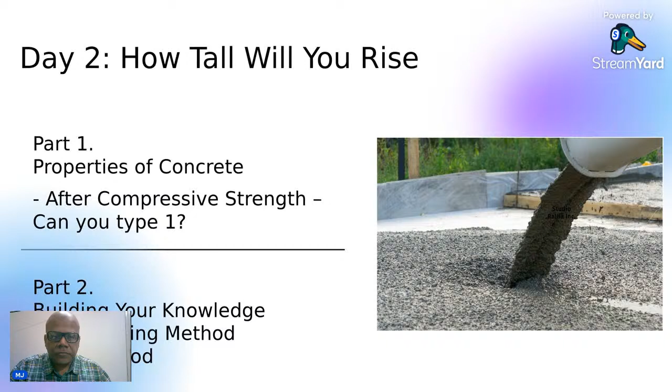And learnings from day one, very quickly I will go through them again. I'm always looking at the clock, to see that I don't spend too much time on something, so that we will have little time left in our 90-minute span for other things.

Okay, so yesterday we discussed that the future belongs to the expert. So somebody had asked a very nice question, and I didn't answer it yesterday - how many civil engineers are there in India today?

Indian construction industry is going to be the largest employment giver in our country as an industry. That means by year 2022, 75 million people would be employed by this industry, out of which around 50 lakhs are civil engineers. What happens to other civil engineers?

So many join the profession. Every year we have seen 4-5 lakh people are added. So we are talking only about the last 10 years. If we calculate like that, 50 lakh civil engineers working. These are all estimates - I got this figure from a study done by Economic Times, and it is available on Google, you can check it. But there is no pakka, foolproof answer to the question. The answer is about 50 lakh, 5 million.

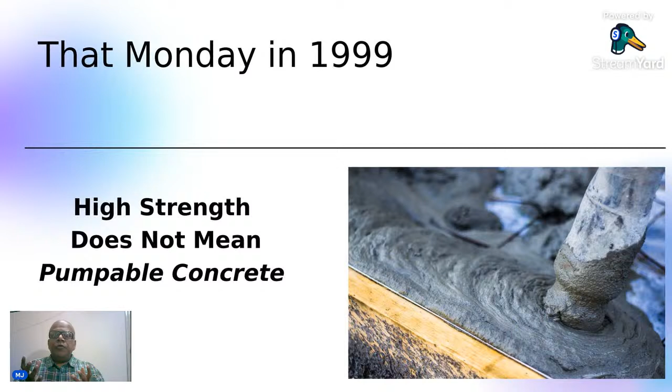My boss was very angry with me on that particular day. But the next day he called me into his cabin - Mr. Klaus Munz - and he said, Mr. Joshi, do you know that in Europe we use fly ash in concrete, which helps us in pumping.

It was year 1999. Even for Europeans, it was a new concept. But thank God my boss had heard about it, or maybe he called someone the previous night, to find out how to make the concrete pumpable.

I said, sir, ash? He said, yeah, from the coal. I said, sir, ash from the coal you want to use in concrete? I thought my boss had gone mad. Who will use ash from coal in concrete? It will spoil the concrete.

He said, no, go and check first. It is a good thing which is used in many prestigious structures in Europe now, and it also helps pumping.

So then I started finding out, and I came to know there was a company just coming up at the end of '99, year 2000, in Nashik, who would process fly ash and sell it for concrete. Oh my God, I thought my luck is finally favoring me. So I started doing a lot of study of this material called fly ash.

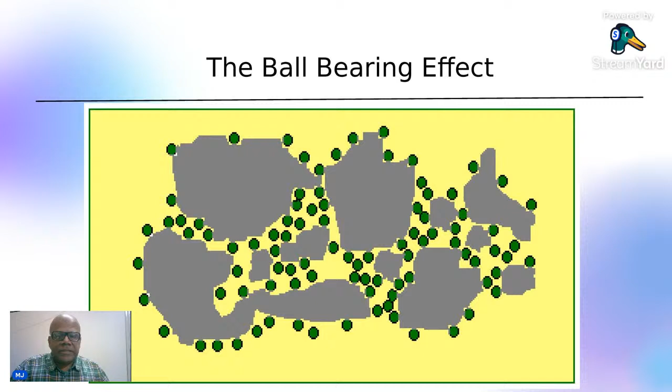So I had a mentor during my very early years, '91, '92, Mr. T.T. Fatehi, a great civil engineer and also a structural designer. And he told me once, Mr. Joshi, do you know why we have these columns thick, and why the coconut trees are so thin? A coconut tree is a horrible cantilever structure, isn't it?

You see, so much load is there on top of that tree, and then the wind blows, but the coconut tree doesn't fall. So what is the civil engineering behind this? And why, for our building, do we need such heavy columns? Not one, this is a single column structure, a coconut tree, but we need 4, 6, 8, 16 columns. We need a core wall whenever we are building a skyscraper. So why is it, he asked me, that we engineers cannot design a structure like a coconut tree?

So I said, sir, maybe our technology is not so advanced. Maybe we don't understand materials the way nature understands how to design them, like the trunk of the coconut tree, how elastic it is. He said, yes, that's the right answer, the modulus of elasticity.

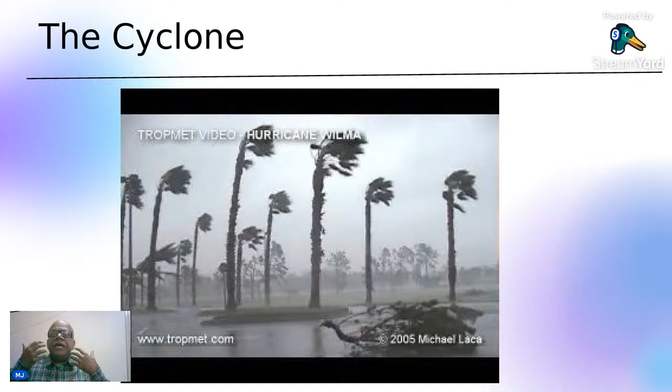So this point gave me a lot of thinking at that time, particularly this term, modulus of elasticity. In all our college days, we have used the value of E, the modulus of elasticity, in solving all the problems. But I never really understood this term, modulus of elasticity.

So today we will see a few of these terms, as I said, from the Bible of our civil engineers, IS 456. All these terms are defined, given in our IS code, and we should look at them and understand them, because that is where the real durability of our concrete comes from.

So compressive strength we all know, right? But the question is, do you understand strain? Everybody, 100%. What is strain? What is strain in concrete? So you take a certain object...

and you apply pressure on this object. This is just a bottle and I am applying pressure on it. So when I apply pressure, I am generating stress on it. So whenever there is stress on an object, there is change in the length. Assume that this bottle is 1 meter long and I am pressing it, applying some stress.

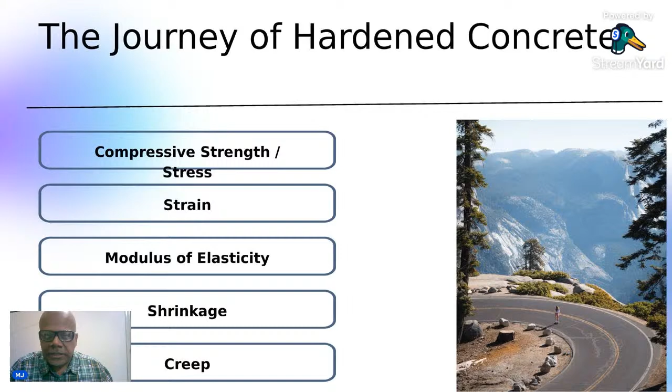In civil engineering, let's turn it around. Let's say this is our cube and I am applying stress on it. So here it is, our cube, and you are applying stress on this cube. The moment I apply stress, the height of the cube, which is 150 mm, is going to change.

The height is going to reduce, and that is what strain. So strain is dl by l. Mr. Patil, thank you very much for your answer - change in length upon original length.

Very simple concept, right? But the problem is the modulus of elasticity, we define it as stress divided by strain. So let me say, on this cube, I have applied lot of stress, and let's say this stress is M20 grade concrete, so 20 Newton per mm square. Stress is nothing but the strength of your concrete.

Whenever we get confused about what is stress, don't take stress because of that. Stress is our strength of the concrete. So M20 concrete is 20 Newton per mm square.

Now I am pressing it, and after pressing it, a 1 meter beam or 1 meter column of concrete deflects by 1 millimeter, only 1 mm. The length is reduced by 1 mm. So stress 20 Newton per mm square divided by 1000, because 1000 is the original length and 1 mm is the change in length. That ratio gives you modulus of elasticity.

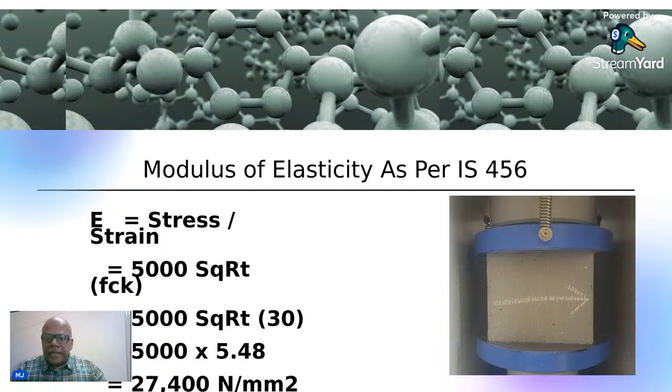If I go ahead, these curves are much more visible. Okay fantastic, so let me go to the next slide, and there are some curves here and they are visible now. It is the same graph.

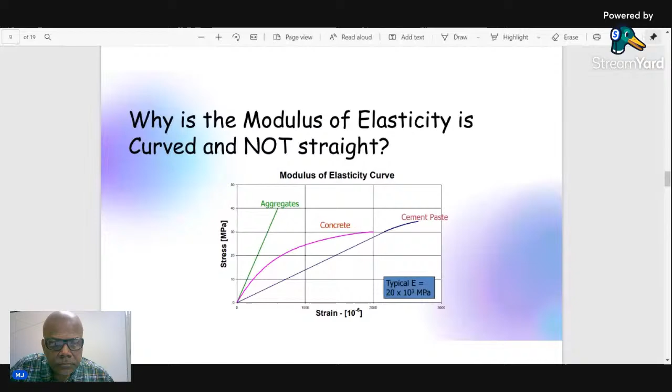This is also a slide that we covered, I already spoke about this. Higher the strength of concrete, higher is the modulus of elasticity. That helps. We don't want concrete with low modulus of elasticity. We won't be able to stay in a house like a rubber band. If there is so much deflection every time, so much change in length every time, we will not be able to stay in such a house. So higher the strength of concrete, higher is the modulus of elasticity.

And sometimes designers take help of this particular property of concrete. So your compressive strength requirement is only, let's say, 40 Newton per mm square, but they will design it for 60 so that they can control the strain in concrete. You want to control the strain, the deflection. In certain unique cases, this can be the case.

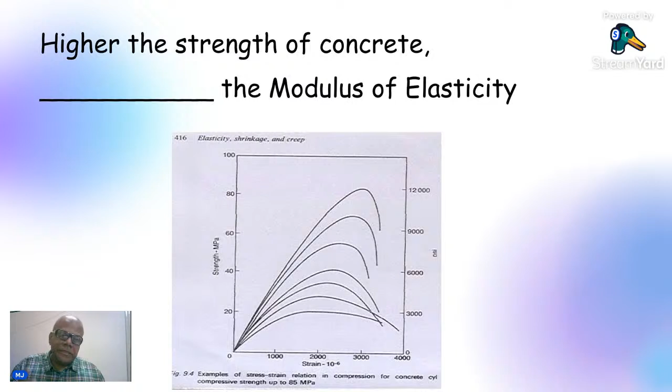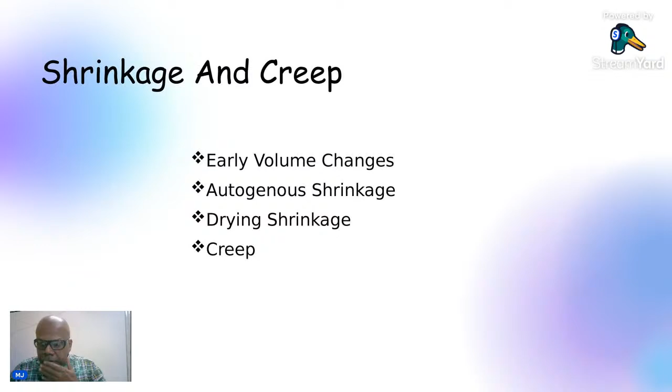So once we understand modulus of elasticity, then we can speak about shrinkage and creep. Let's go to the next slide.

We all always hear about this word shrinkage, of which there are two types. I have already given the answer, plastic shrinkage. So plastic shrinkage and drying shrinkage. These are two enemies of all our civil engineers. If you are working for an RMC company, you will know, or if you are the concrete supplier, or the contractor, you will know the client will come and blame you the next day once you have done a nice slab.

So you are doing the concreting, let's say it is the 20th story concrete, and next day you come and find big cracks on your slab. Has it happened with you? Yes, if it has happened, just type yes. If you have seen cracking on the slab the next day, type yes in the comment so I will also know that you are still not asleep. Just type the answer quickly, let me see who types, I want to check that.

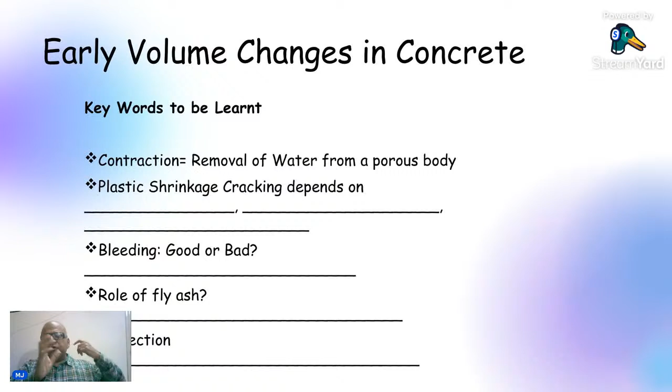After that, the third point is the water to cement ratio in your concrete. Keep it as low as possible. Keep the free water content as less as possible. It is again connected to the point of modulus of elasticity which we saw: use less cement. If you use less cement, there will be less water available. You will be forced to use a lower water to cement ratio when the aggregate content is high and the cement content is low. That's another point we'll cover tomorrow: aggregate to cement ratio. Concept is less cement, less water to cement ratio, high aggregates, low creep in your concrete, less strain in your concrete, and at the same time low plastic shrinkage. All these things come together fortunately to help us create great concrete.

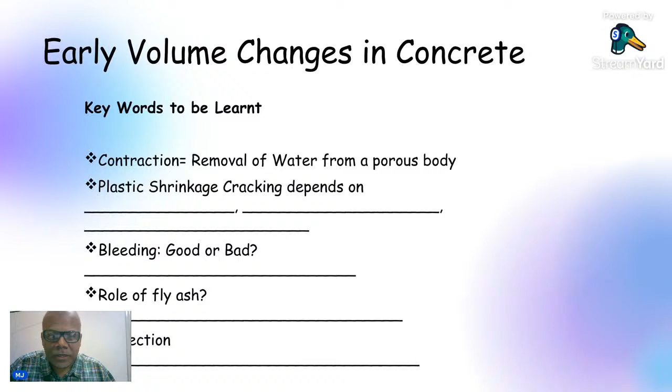Now friends, let's go ahead and cover some important things. How to design a great plaster, we are going to discuss that too, but I will use these slides tomorrow. Now I quickly come to our most important part 2. I want to cover it in the next 15-20 minutes and leave some time for questions.

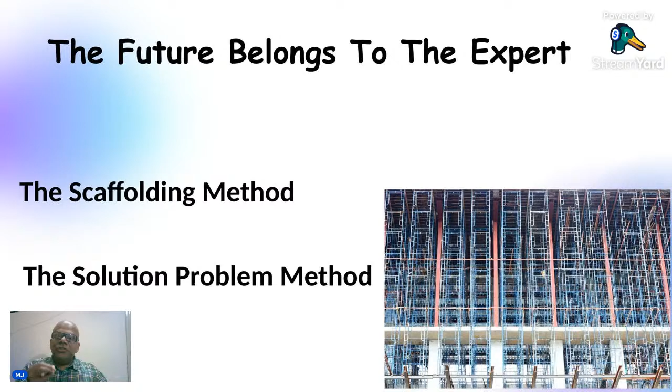Start with your lunch table, and you don't know where life will take you. Once you start, if you don't demonstrate, it can be a Firozpur Janta journey or it can be a Rajdhani Express. But if you start demonstrating, you start using LinkedIn, you start using Facebook, we don't know where you will go.

So the three questions: what is the future of concrete as per you? Not everybody sent me email yesterday, only I got a few. So think about it. What is the future of concrete? Not after 200 years, after 5 years. I gave you some hint about it yesterday. Think about it, write the answers and email to me.

How are you going to prepare for this future? One way I said is demonstrate yourself, that is the career growth path. The other way is, here is a link for you to download the PDF material. Our course director Anup has posted it on my behalf. Thanks, Anup. How will I prepare for this future?

How will you prepare your knowledge for that? We will look at the future of concrete tomorrow. And which are the two areas you will start teaching others? Maybe some concepts from today's session, some from yesterday, or maybe some things which you already know about civil engineering, which others don't know so much. So which are the concepts you will start discussing over your lunch table?